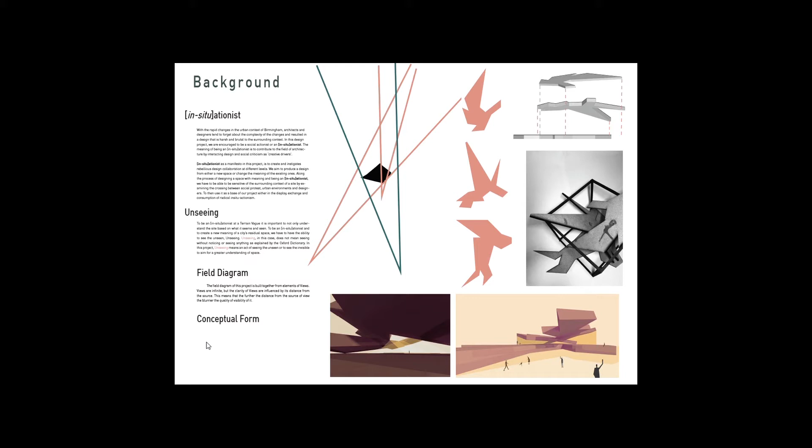Unseeing, the brief is to create a halfway house and community center for an ex-convict, in purpose to adjust them in an in-between space before they regenerate back into society. The purpose is to gradually adjust the user's experience towards the architecture building.

Bringing the concept of seeing is to design an architectural building that gradually increases the level of freedom by manipulating the space to fit a certain level of seeing.

The ex-convict, especially the one who has been living in prison for years, has been adapted to a living condition that supposedly punished their existence, where architecture design is lacking openings, sometimes overcrowded space, natural light, and material that does not bring up the atmospheric quality within the space.

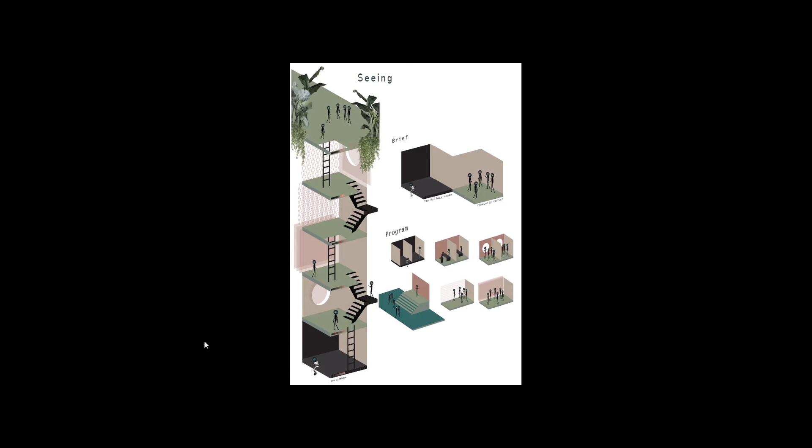The idea lays on the problem where when the users are finally released back into society, there is a big jump from so many limitations of an architectural space to almost infinite limitation of an architectural space, which leads to many further well-being issues.

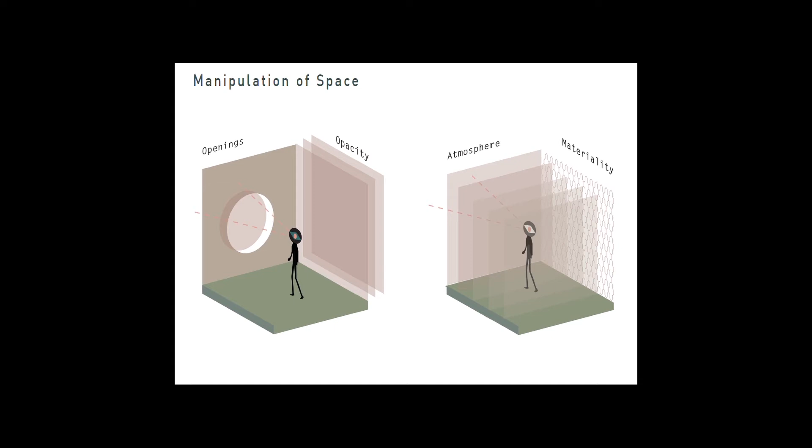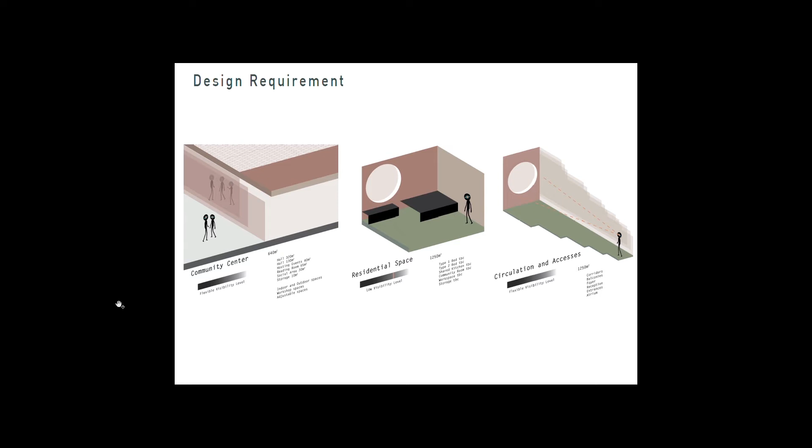There are different ways to manipulate the space through opening, opacity, light, or atmosphere and materiality. Within this project, three main space focuses, where I will mostly try to control and manipulate space through openings, light, opacity, and materiality. Then we move to the macro scale of this project.

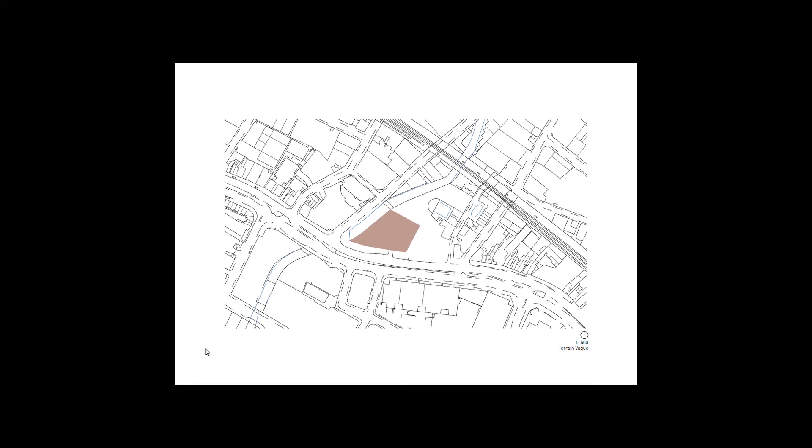The site is located in Digbeth, Birmingham. This is the field diagram, which is an anchor of the project.

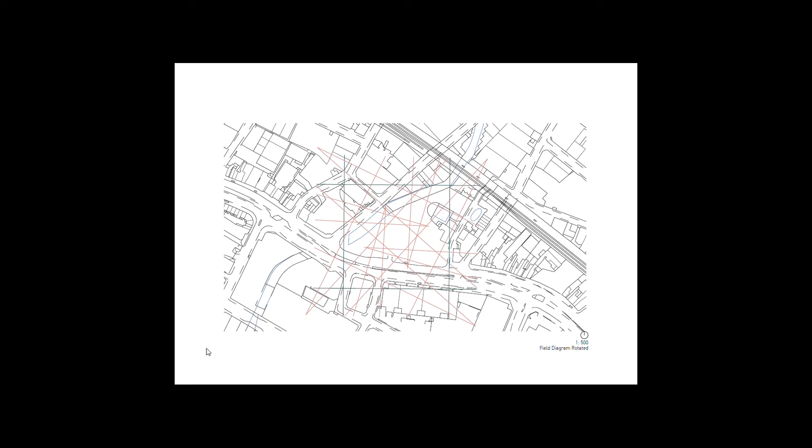From the field diagram, which only faces the north side of the plan, I start to rotate to see all different sides of its field forces towards the site. And here's the conceptual form, where I experiment in terms of its scale and see which one fits the most to this site.

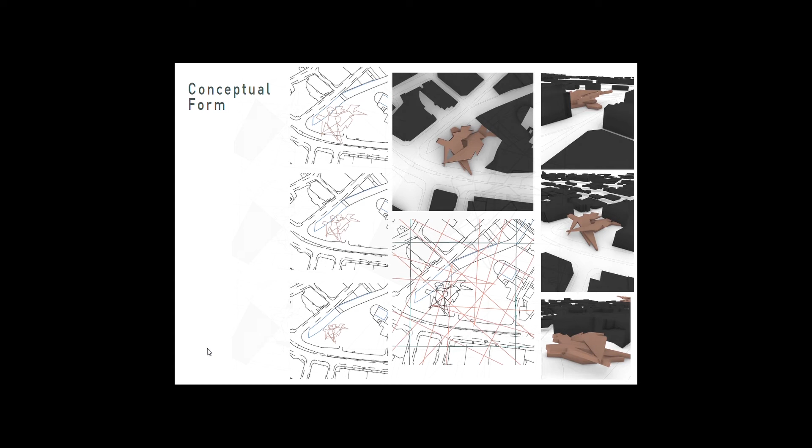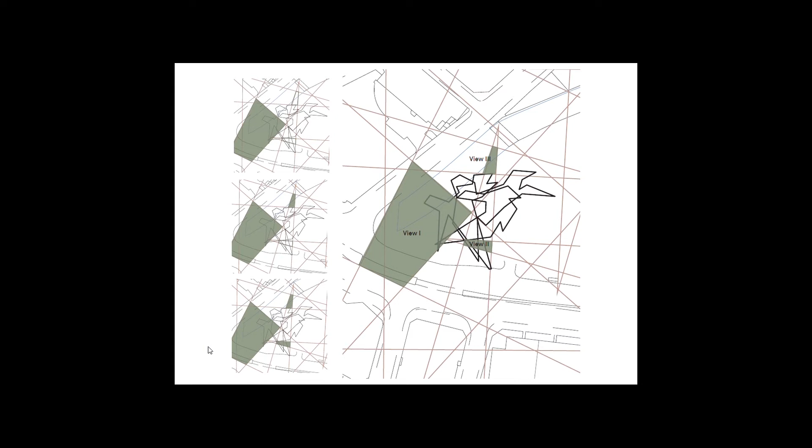Then where the field diagram interconnects, I created a rule of thumb for this project to allow me to define it. Here, three main levels of seeing will be analyzed. The conceptual form consists of three conceptual plates, each representing a different level of view.

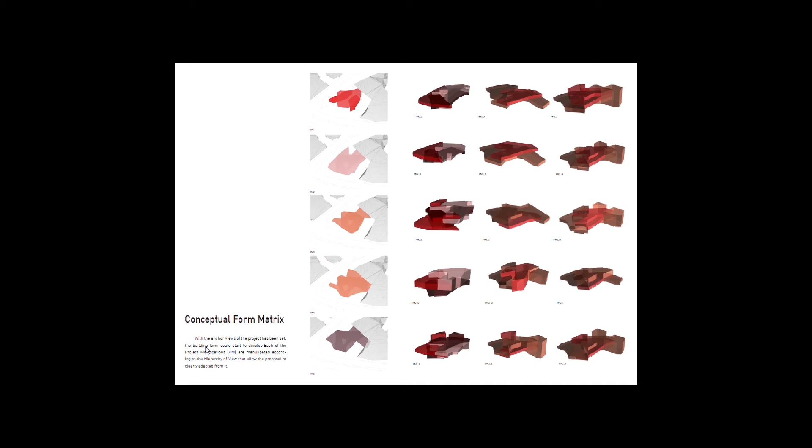From finding the anchor of the project, I started to see the architectural form within the conceptual form and field diagram. There, I created a matrix of how I will start to analyze and see the massing of a building according to the rule of seeing.

From the matrix, I will be focusing on the right-hand side of the massing, which is the appropriate massing for the project, and it fits within the rule of thumb and within the site itself.

For_Seeing is a device, and its purpose is to allow the project to have a systematic program to help manipulate the scene from inside to outside.

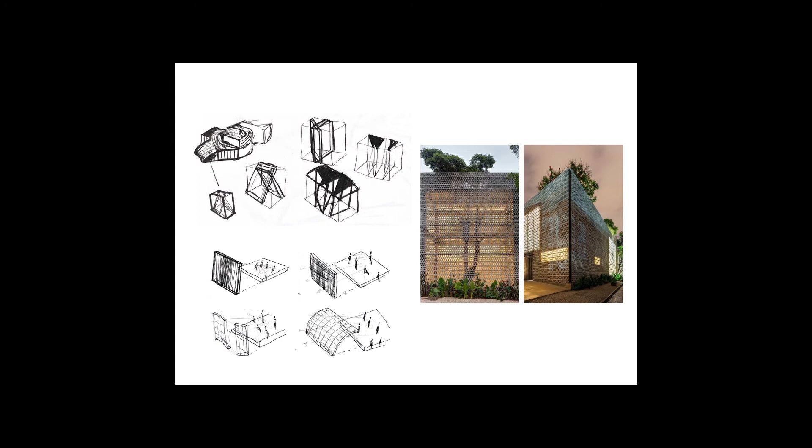Many have their pros and cons, but one of the upmost problems I'm trying to avoid is the glare issue that may happen if the For_Seeing shape has a high contrast of light within the inside to outside space.

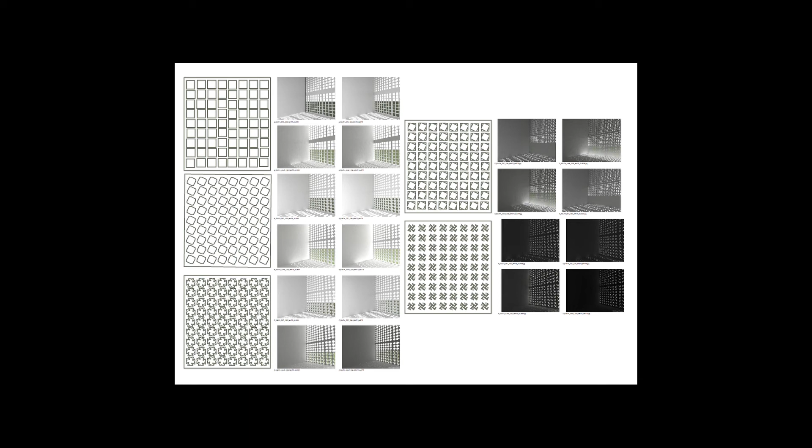From there, I also experiment on its potential materiality. First is glass, which has its own advantage of being able to control the opacity, but having each individual piece made in a different gradient of openings and opacity seems to be a difficult problem.

Second is timber. Timber is a light material to be used as a skin of a building, and it has its own signature atmospheric sense in how it reflects and casts light within the space. But with the mock-up frames, when I experiment with shadows, the results are not really what I'm looking for.

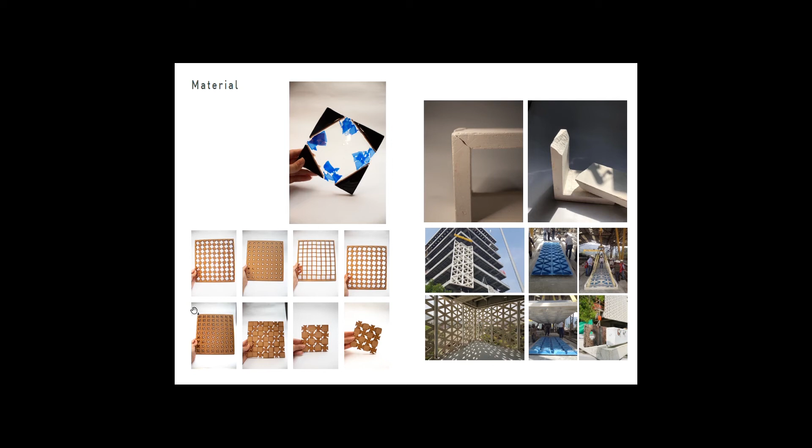The third material is cast concrete, which I will use as the material of this device. Concrete as a material seems to fit within the industrial urban context of Digbeth, and from the experiment I did, it beautifully casts shadows. From the shape experimentation and materiality, the final For_Seeing device is taken place.

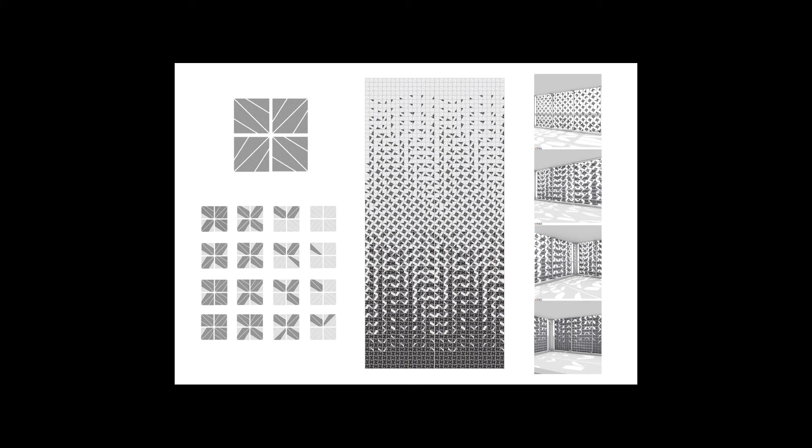For the gradual sense of seeing, a systematic program is made to gradually increase the level of seeing as it goes up a level. Going back to the rule of thumb of view levels, since each individual view is placed in a different direction, they may lead to a different solar gain level throughout the year.

For example, view 1 faces the west direction, and the problem may lie during the summer solstice, where there is high solar gain, mostly during the afternoon, which the For_Seeing device will act as louvers and filter some of the solar gain.

A bigger problem may occur during the winter solstice, where the sun sits at a low angle and there will be a lack of solar gain within the building.

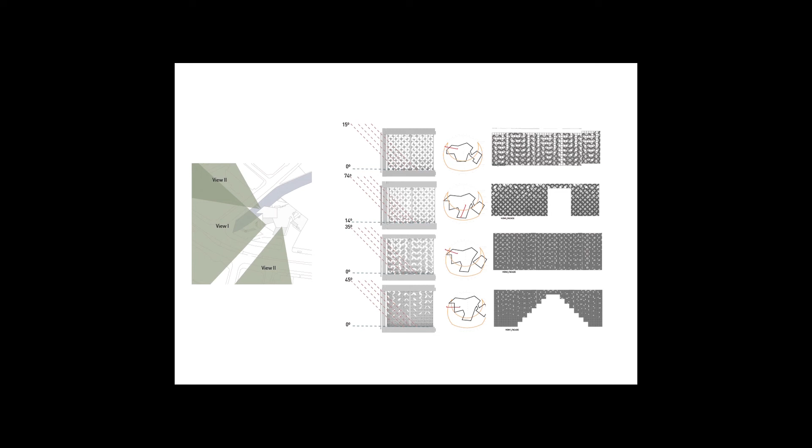Taking into consideration the depth of the building, some manipulation of the facade will have to be made. In view 1, there will be more openings to bring in some natural light during the winter solstice.

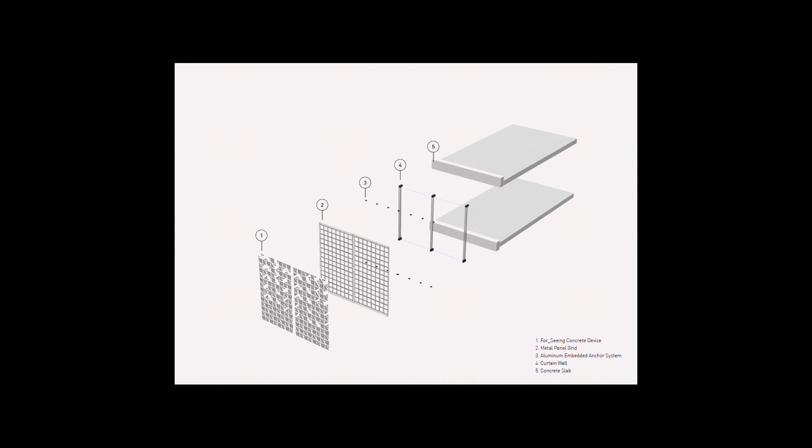This is a systematic program of how the facade will be cast within the building, and this is how the For_Seeing concrete panel will join into the building in more detail.

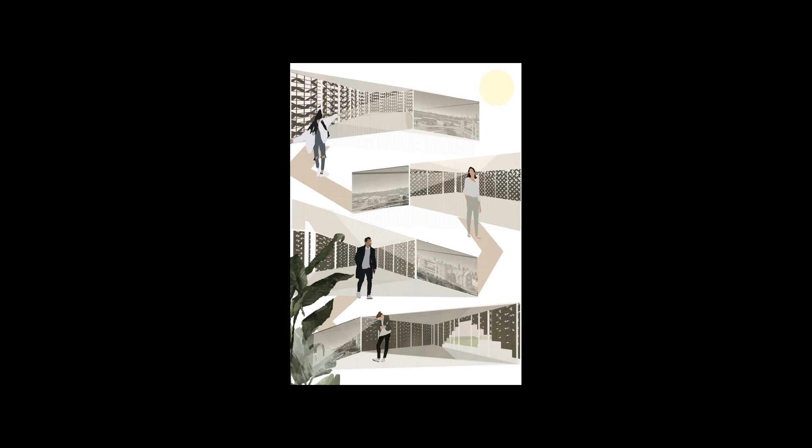Lastly, this is the final outcome of the Seeing project. In this diagram, it shows how the seeing device fits within the space and how it obstructs seeing and obstructs light.

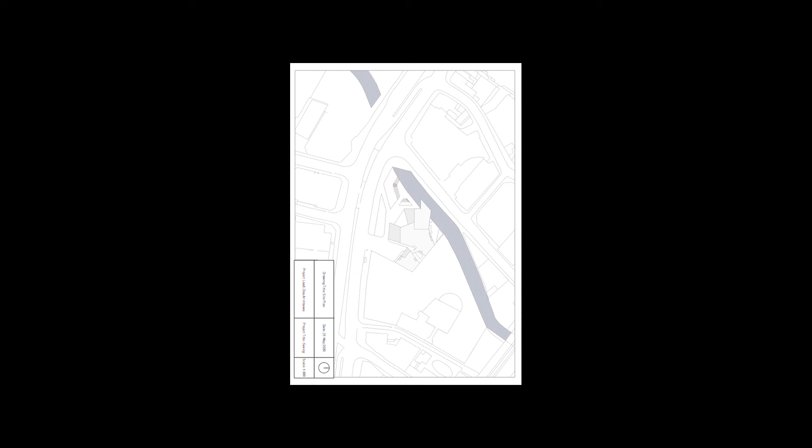This is how the building sits within the context of Digbeth. This is the site plan of the building that shows the landscape and the condition of the site.

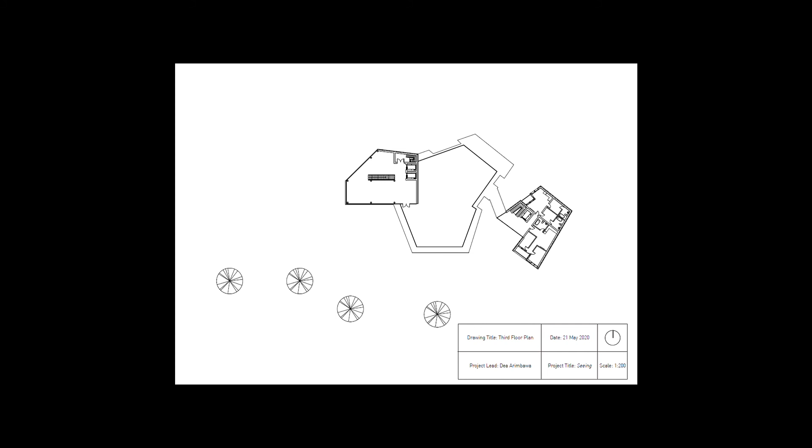This is the ground floor plan of the building. This is the first floor plan. This is the second floor plan. This is the third floor plan. And lastly, the roof plan of the building.

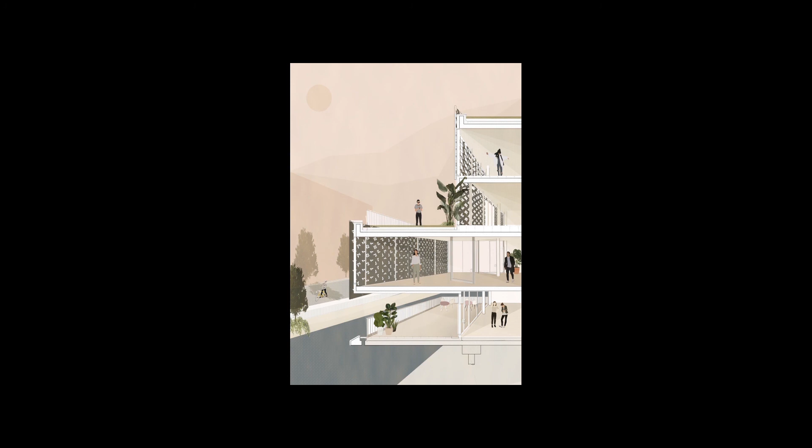In this sectional perspective, it clearly shows how the seeing device manipulates the space and controls the seeing level within a space, and how it gradually opens up as it goes up the level.

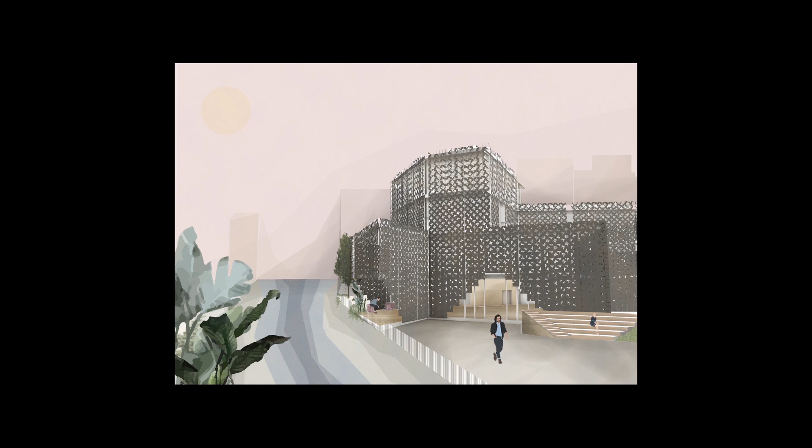This is how the halfway house will be designed. This is the interior, showing how the light affects the interior space within the halfway house.

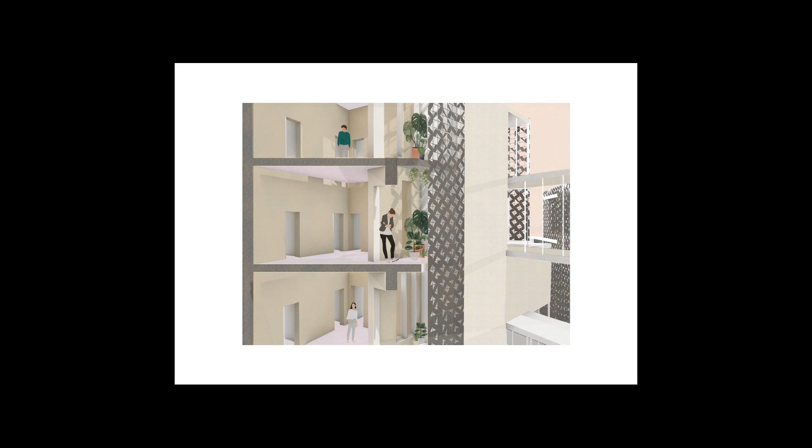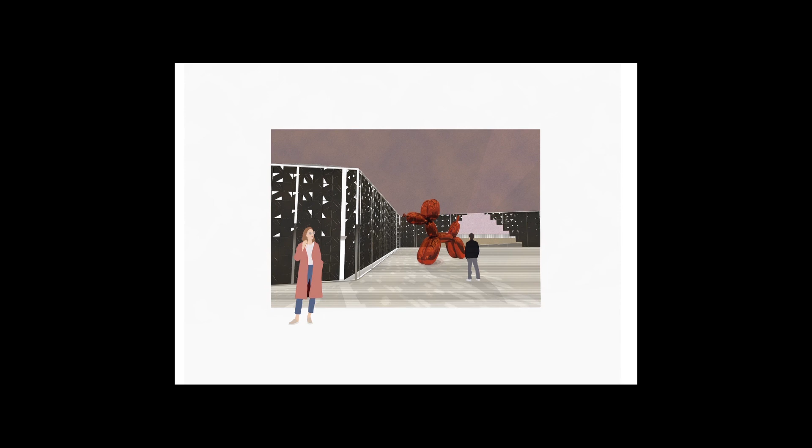This shows a perspective of the building on the north angle. This is the first view of the building, the second view of the building, and the third view of the building.